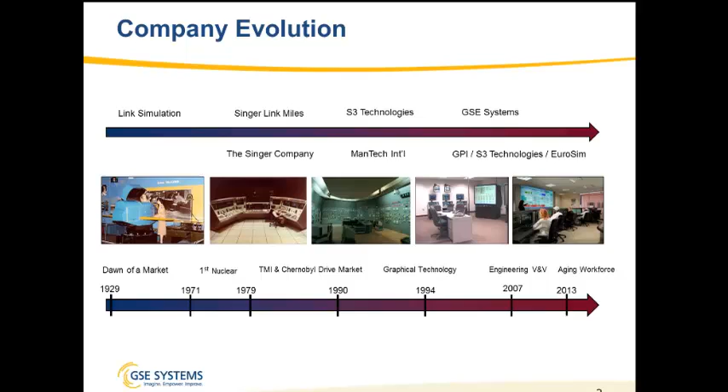So leveraging our simulation heritage, we're really focused in two areas. One is in training, and a very lofty goal that we have in changing the way the energy industry learns. If we think about how we learn versus how the next generation of workers learns, there's a dramatic difference. And we're using our simulation technology combined with other technologies regarding visualization and other learning content to provide what we hope to be a faster, more engaging, more effective learning environment for the next generation of workers, getting away from the chalk and talk and providing hands-on experiential learning.

Of course, the other application, again, because of the ability to start integrating true engineering code into the simulators, we're now using the simulator environment not only for training, but for engineering design, verification, and validation. And that's really where the topic of today's discussion will head in a minute here.

So as I said, as we try to change the way the energy industry learns, it's the application and the underpinning of high-fidelity simulation, but being applied in some new areas, whether it's how to visualize what's happening inside of a reactor, so you paint that correct mental model for the students.

In a training environment, you're really trying to help the student picture what's happening in the plant. And if we can use technology to help make sure that not only do they get the picture at the same time, but they get the correct picture, that helps them understand these complex processes and concepts a lot faster. And we also are using visualization for task-based training, whether it be equipment diagnostics, equipment fundamentals, plant walkthroughs, and things like that.

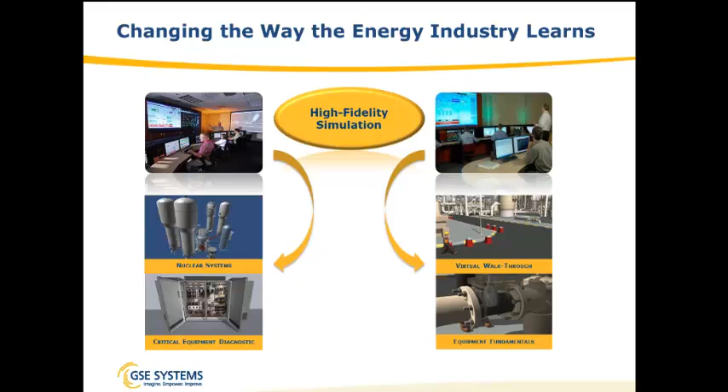So jumping into the real meat and why you dialed in here today, I wanted to start with some of the things we've noticed as we've been out in the marketplace working with customers, applying simulation both from an engineering and from a training perspective. Obviously, the introduction of digital instrumentation and control is a key factor in the power industry, more so probably for nuclear than in thermal power, since it's been used in thermal power for many years. As new plant designs and life extensions come online, the industry's and, equally important, the regulators' understanding of these systems is really critical. So the real-time dynamic simulator is playing a new role in servicing those challenges of the market.

So maybe in order to understand where we are and where we're headed, we take one step back and look at where we came from. If we look at real-time simulators back in the dawn of that age, back in the 70s, 80s, and even into the early 90s, we fully modeled the plants, but simulation back then truly was as much an art as it was a science. The engineers had to find ways with limited computing power to replicate that control room so that the operator could tell no difference between the simulator and the actual plant control room. Often these models were what we call handcrafted. In other words, there was a lot of engineering discretion and personality in the development of some of these models, and they were fine for the purpose back then, which was replicating what's happening in the analog control room or panel control room environment.

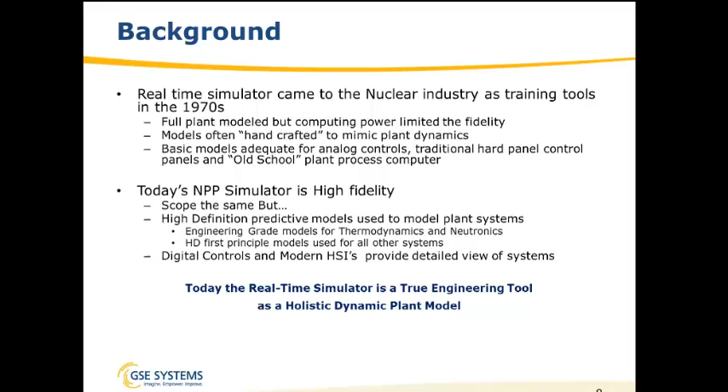Some of the other critical issues, particularly for the new plants coming online or being designed right now: obviously we're introducing new technology that's never been tried and tested. The new control systems and information systems are extremely complex and have complex logic and control. The plant is integrating a lot of disparate technologies for the first time. So even though there is a push towards standardization of nuclear plant designs, the AP1000 being a prime example, you still can have a nuclear island designed by one company and the balance of plant conventional island designed by one or more other companies. So integrating all that technology is still a challenge, as it was at the dawn of the nuclear age.

Coordinating the technology between the providers for the different units, ensuring that the technologies are integrated, is a big concern. And obviously getting these plants online, generating power as quickly as possible, is squeezing schedules in order to get a better return on investment, and we need to find ways of using technology to help achieve that goal.

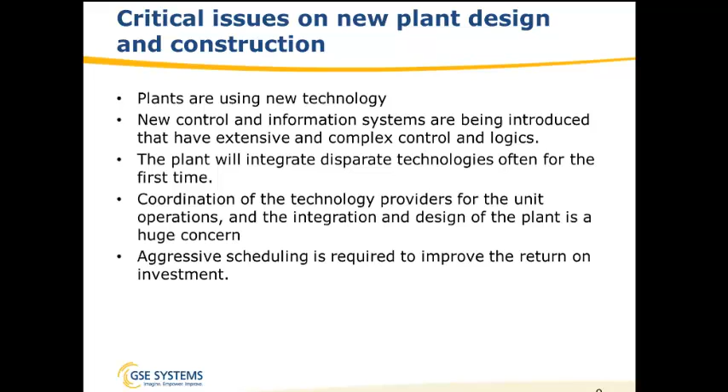So what's the role of an engineering simulator? And I'll go into some of these in more detail. One is that we call it a holistic engineering verification validation platform, meaning you can see your entire plant, and oftentimes the simulator may be the first time you see your entire plant operating before construction and commissioning. So it's not a system by system view of your plant, but it's how those systems work together.

Obviously, it's well known that they're using simulation for verifying and validating the control system design and implementation. Human factors engineering is another key use for simulators these days. And with new plants, we're talking about new designs, and therefore we need new procedures. So using the simulator to help develop and then ensure that the procedures are going to result in the plant operations that are expected. And then at the end of the day, you still have your ANS 3.5 training simulator, but you actually have that available to your team a lot earlier in the construction process.

And what we have found is that even to our surprise, the simulator really is on the critical path for a new plant design. The need to have licensed trained operators, the need to have licensed trained instructors to train those operators drives the need for that simulator a lot earlier in the plant design and construction process than I think anybody anticipated a few years back.

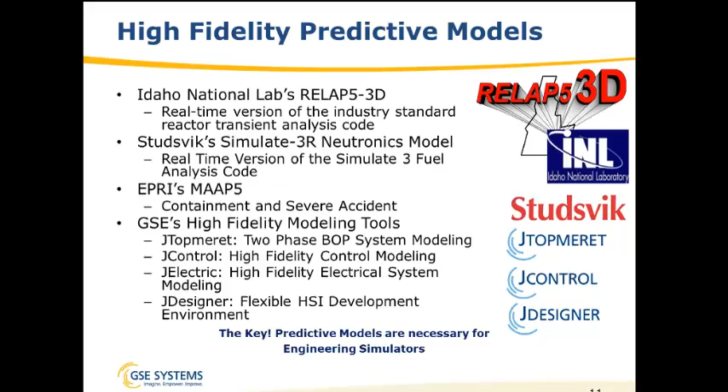From an I&C design platform, we've come up with something we call Control Sim, which is a platform that integrates the logic and control design tools, the man-machine interface design tools, and a very robust and fully integrated information management system that not only is information management but configuration management system as the plants change. So as we're building our simulator during plant construction, obviously data comes in buckets to us, not all at once, and we have to be able to manage the changing information and do that in a very robust and seamless way for the customers.

So the Control Sim environment is also used by some of our customers as they are trying to take more control over design of the plant I&C. So the same set of tools that we would use to simulate the plant I&C, the customers are using to do that top-level design, developing the base icons, the control logic design, creating the IO list, the AutoCADs, the set point definitions, and basically coming out with a DCS specification. And all the time we're bouncing those designs against the simulator and the dynamic models to ensure that the strategy is going to work and the implementation of the control system is going to result in what they expect.

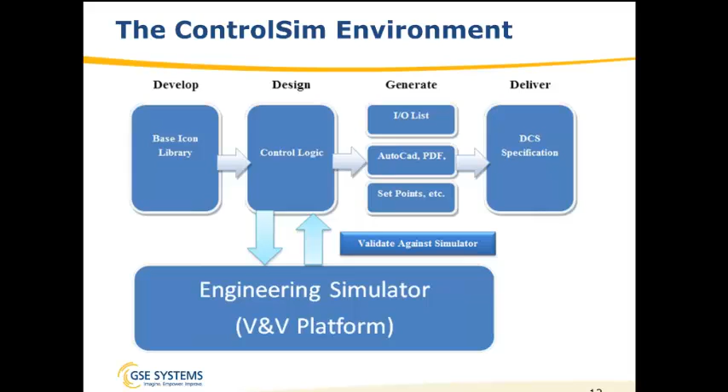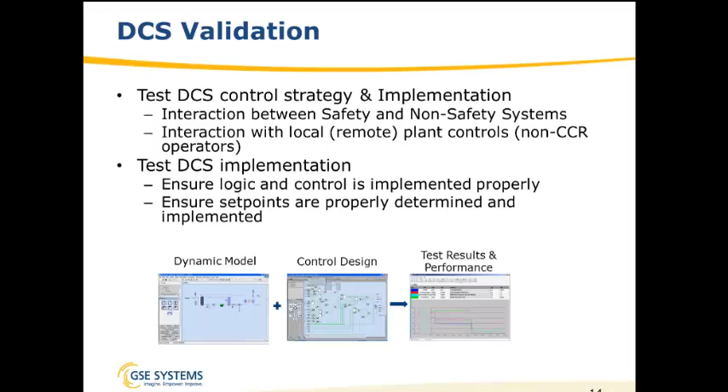So again, just an idea about the different types of things that we look for. The interaction between safety and non-safety systems, the interaction between control room and non-control room operations, and then again ensuring whether the logic and control has been implemented correctly.

And the next slide gives you an idea of the experience we've gained both in nuclear and in thermal power, as we've used simulation to test out DCS systems. And these are the typical types of problems, and it's unfortunately not just one or two that we find. It tends to be hundreds depending on the stage of the project we're in.

And whether it's incorrect permissives that would prevent equipment from starting up, incorrect tags, loops not connected. It's a wide variety, oftentimes not big mistakes, and if we can find them on the simulator, they're relatively easy and relatively inexpensive to find. If you're trying to find these during plant commissioning, it's obviously the most expensive time you could be trying to solve these problems. So using the simulator just makes a lot of sense.

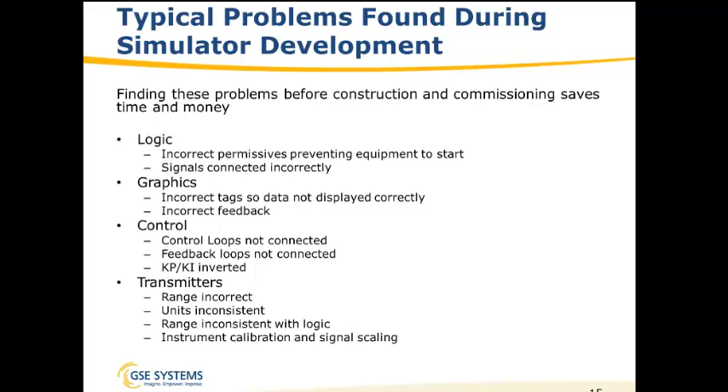From a human factors perspective, there's a lot of different things we've been able to do using the simulator. One is the layout of some of these new control rooms. So whether, again, we're talking going from an analog control room to a fully digital or a hybrid control room, what information do we have in the control room? If we look at some of the new small modular reactors where a single control room may have up to 12 different reactors being operated, the paradigm is shifting. How many reactors can a single operator manage?

So using the simulator has helped some of these companies determine what that optimal number is, and more importantly, it will help them convince the regulators that that change in operating philosophy is still going to be safe and effective. But back to the details that we tend to uncover using the simulator from a human factors point of view is where should the information show up? How much information should we have? What's the navigation through what will likely be hundreds of DCS screens? And the density of information, the concern about information overload.

In the old days, it was very difficult to change the information provided to the operator within a control room. Now, with the DCS, there's hundreds of thousands of bits of information that potentially could be presented. So, what is that right information, and how easily can the operator diagnose and resolve a problem? How many clicks does it take to find out what's really going on in your plant? We now have new modern alarm management systems.

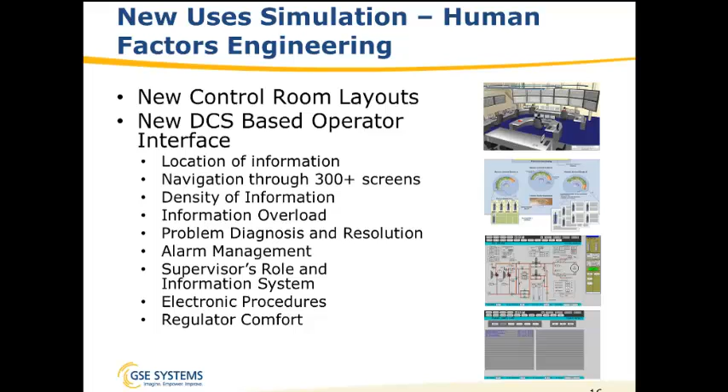So a few examples of things that we've been doing here in the United States with the U.S. Nuclear Regulatory Commission is developing human-machine interface designs connected to existing simulators so the regulators themselves can get a better appreciation for how these plants will be run and what their role is in regulatory space. And same thing with other aspects of the U.S. NRC, Idaho National Lab.

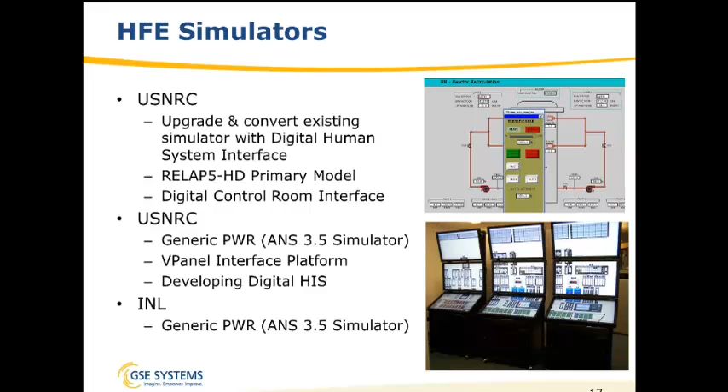And this is why we feel somewhat qualified in talking about this, and we've been working on a lot of what we'll call first of a kind engineering simulator projects, whether they be nuclear or non-nuclear. Westinghouse AP1000 and the simulators that we're building with them for the Haiyang and Sanmen plants in China, as well as the Vogtle and Scana plants here in the United States, working with several different small modular reactor design companies, whether it be NuScale, B&W's mPower, the KAERI SMART Reactor from Korea, and what used to be the Pebble Bed Modular Reactor out of South Africa before that project was terminated.

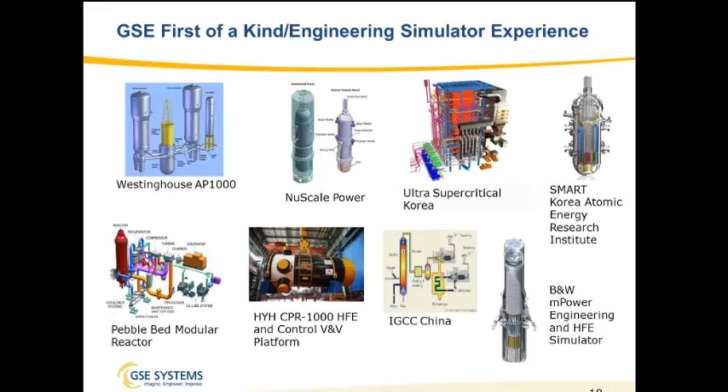We're also working in non-nuclear space, and again, bringing the experience that we've gained in the process and in the thermal power industry adds some value when we're talking about DCS integration, human factors, and using simulation for design V&V, even in the nuclear space. One example is using our simulation technology to help do DCS V&V for the Chinese CPR 1000 design. So we used our simulator to help design the control strategy, the human-machine interface, the automated procedures.

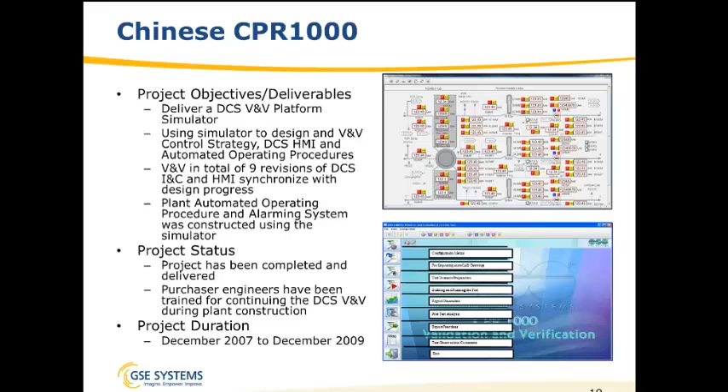As you can see from that third dash, we went through extensive revisions of the DCS in order to come up with the final design that they felt would really work, and again, automated the plant procedures and understood how to do that. The project was really a raving success, and the customer got a lot of value out of it, and we kind of continued taking the next steps with that customer in implementation of simulation for V&V and helping them with their design processes.

Some of the success factors, just a little bit of a wrap-up: again, using the engineering grade predictive models is key when you're trying to really understand how the plant's going to behave, whether the procedures are going to work, how the operator is going to interface, whether the DCS has been designed and implemented correctly.

But it's also important that we look at a different relationship between the vendor and the contractor. Again, in the old days of building a simulator, the customer would give us a truckload of data and we'd go off and design a plant. Now we get that data in an iterative fashion, and we have to do more of a spiral design approach, which means we have to have a lot more coordination with our customer, a lot more flexibility in the design and how we schedule things and how things happen than have ever been required in the past.

But we've also noticed it also provides a benefit to our customers in really helping their different engineering departments, whether it be design or instrumentation and control. It almost forces them to work together where in the past they may not have had to, but in order to achieve the objectives of the simulation project, really looking at it as an integrated team approach between GSE and the various engineering organizations really is a real key to that success.

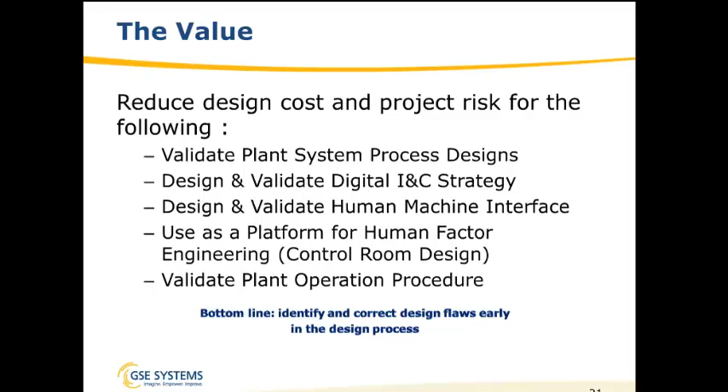We have a question from a research associate at Tsinghua University. He wants to ask how events like Fukushima Daiichi affected the improvement and development of full scope simulators.

Well, I think it has caused us to rethink some of the operating paradigms. So for example, some of the things that we've seen happening here in the United States, even before regulatory mandate has dictated what will happen, is we're starting to see customers looking at certain plant models, and particularly if their plant simulator had been built many, many years ago, they're looking at more robust, for example, electrical system modeling.

So the practice or the theory in the past had often been that we would go without off-site power for a certain period of time, and your simulator may have to run for 8 hours or 12 hours. Now we're looking at events where you might have to run your simulator 72 hours. And during that process, you have to really understand what the effect is of operating decisions on battery life and electrical buses around the plant, and what decisions you can make to extend the useful life of key equipment.